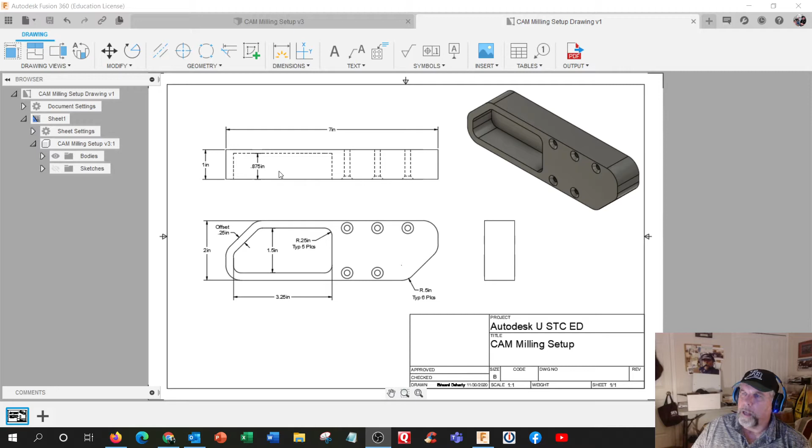Okay, we're going to talk about making a blueprint or a drawing. I just started one here, but I'm actually going to use a sample out of your Fusion 360 class, the introduction class.

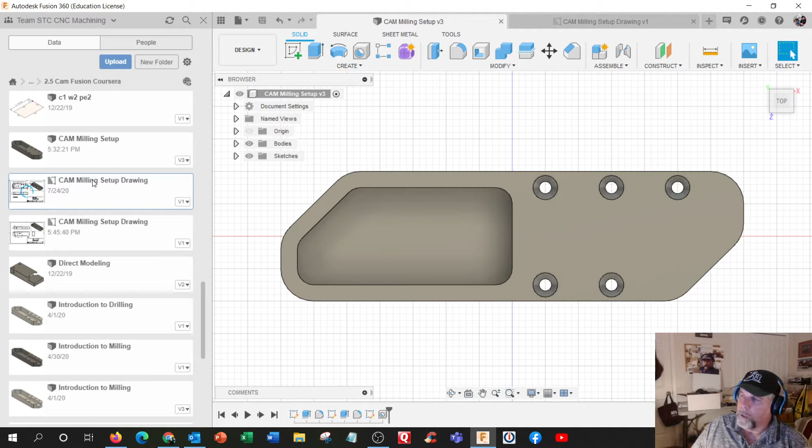In the last week, they got introduction to milling and CAM milling setup right here. Look at that, it's got a CAM milling setup drawing. Here's one here. Let's look at this drawing. I think I kind of like that. That's a pretty good example right there.

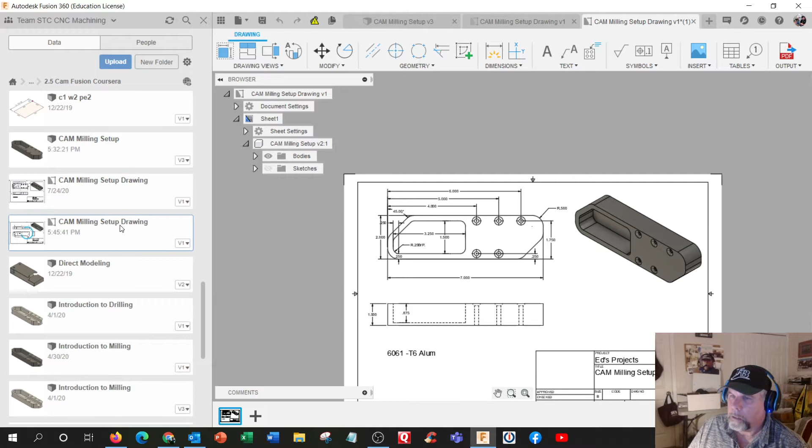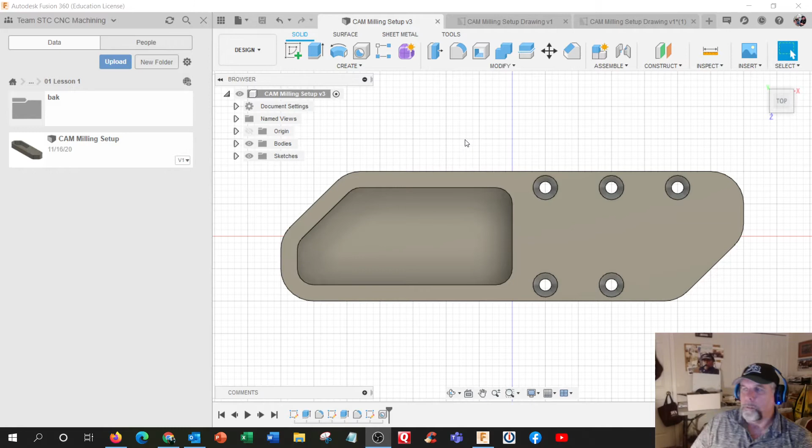And there's another. This is the one I just was working on, this one here. So if you're in your Fusion class, week 3, it says CAM milling setup right here. And this is what we're going to use to make a drawing from. It's a good example, a fairly simple part.

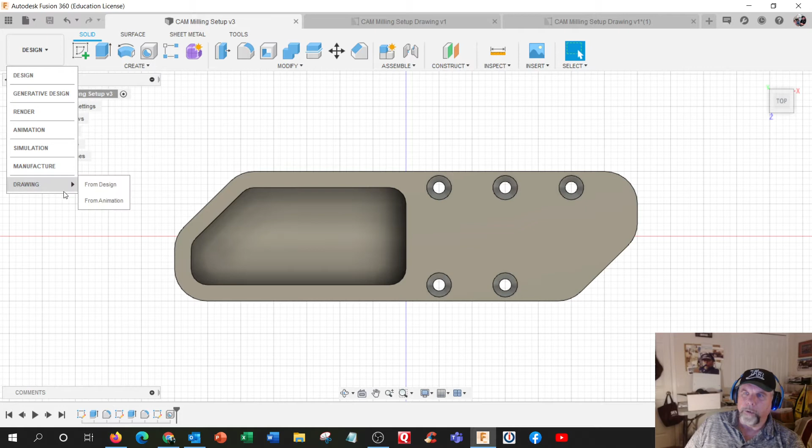So you've imported one, you didn't have to design it. And so we're going to go. So we're using design, manufacture, and now we're in drawing from design. Up here you have as choices: full assembly, visible, or select. And there's only one, so I think any one of these would work. I'm going to create new,

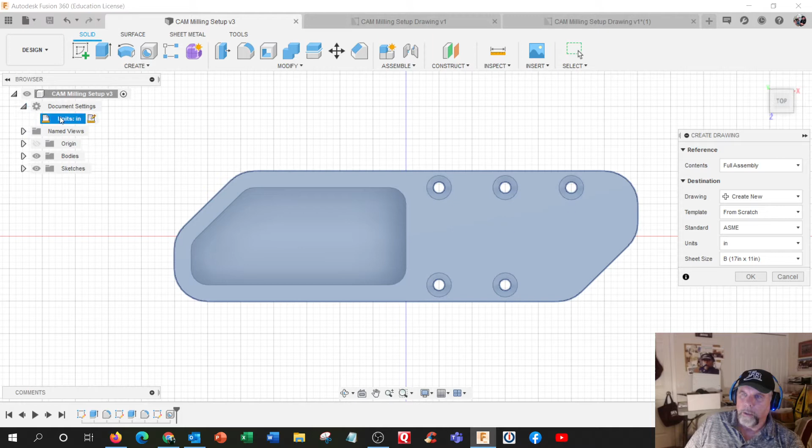and from scratch, and then we can pick a sheet size. We'll just go with the standards. And is this actually designed in inch? Because we didn't design this. And it is an inch, so we're going to keep it an inch. Hit OK.

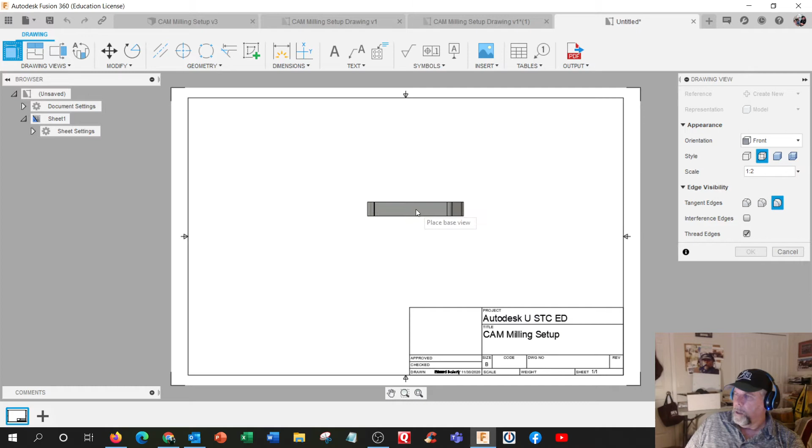Okay, you're going to get actually a quickie setup here. The bottom right is called a title block. But right off the bat, it's trying to place one view, and that's this one here, base view. Personally, I don't like this front view. I want it to be the top view, this one here. I can hit enter, and there's my view right now.

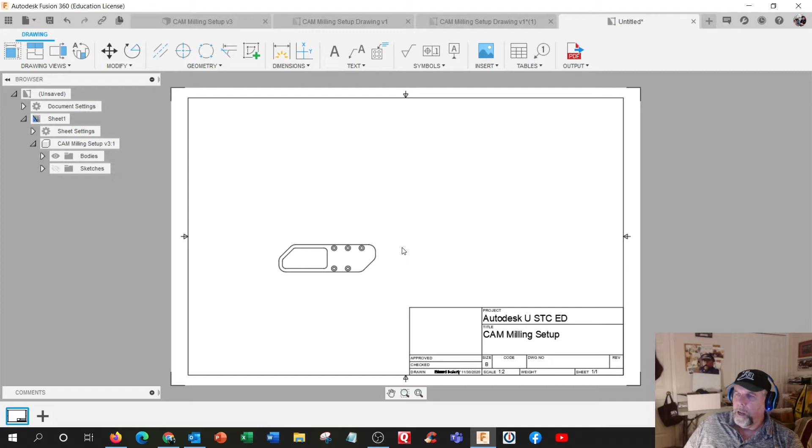Now, I want to have other views based on this, what we call a 2 or a 3 view drawing, and maybe an isometric view on the side. I also want to say that probably this paper is too big, or the scale of this is too small. So I'm going to actually change the scale. I'm going to go in, right click and hit edit view.

And up here it says drawing view. We're working on top, so let's change the scale. And let's go 1:1. And that looks a little bit better. All right, I'm just going to hit close.

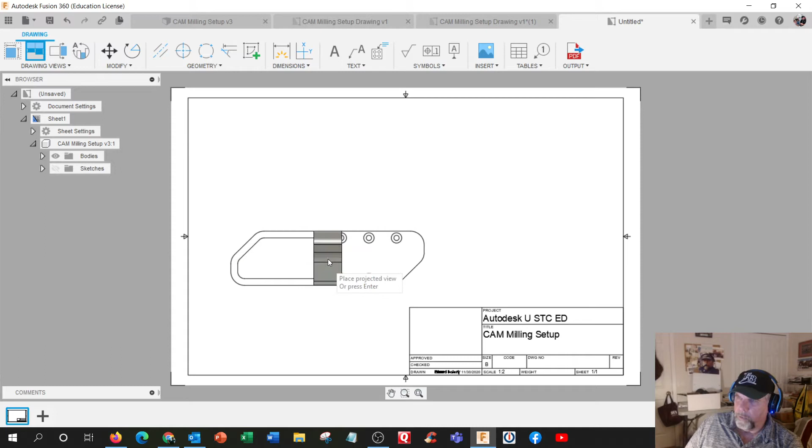All right, so I need to have what call it. I actually call this a front view, and then I have a top view and a right side view. So up here we're going to have projected view based, and it says select parent view. This is the parent view, and I'm going to go up here. And these will stay aligned with each other. You can move them in this direction, but you can't move them left and right. So everything will be lined up. I'm just going to put this here temporarily, hit enter.

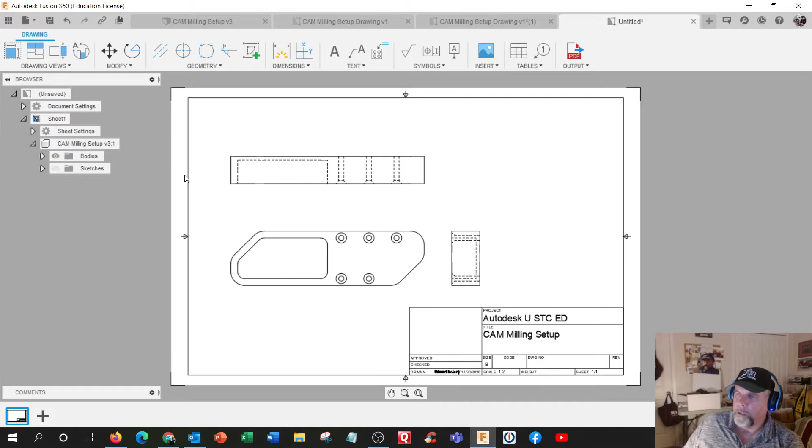And I'm going to do the same thing again on the right side. I'm going to put one right there. Hit enter. That's your typical 3-view drawing in the US standard. I think it's called third angle projection or something like that. I'm going to add an isometric view, so I'm going to click the parent view, and I'm going to put one up here, and right about there. Looks good, right there, hit enter.

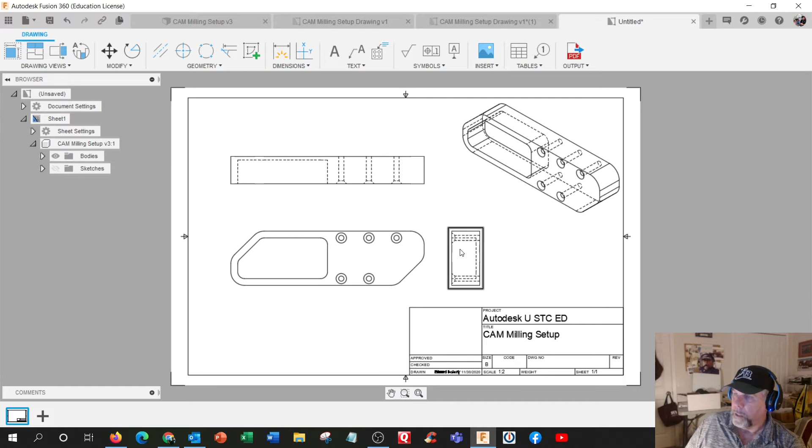All right, so let's do some housekeeping. These are called hidden lines. This says all solid lines, this says hidden lines, like an X-ray view. I want to make this one look like a solid object, like the finished view. So up here, we can select different views. That one's not bad, that one's got hidden lines. That one is shaded, I think I like that one, right?

I think up here the hidden lines are going to benefit us for dimensioning, and this may or may not. We may not even need this view over here, because over here I can see this can give me the depth of the pocket, and I can see these are through holes and they have countersinks only on one side. So I really don't need to see the back of this to know that they're just through. And this is kind of redundant, so I probably don't need this. But I'll leave it there for now.

Alright, so the first thing you've got up here, we got base view, projected view, and this is called sectional view and detail view. We'll get into these later.

And you have modify, which is moving or rotating. And these are like geometry lines for the print: center line, center mark, center mark pattern, edge extension, or you can actually create little sketches on here. So this isn't solid modeling, it's really two-dimensional.

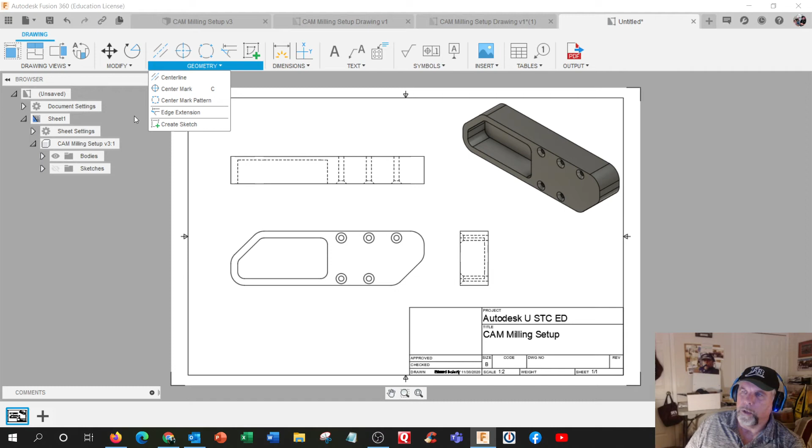And up here, this is dimensioning, the nuts and bolts of this thing. This is your standard dimensioning, this is called ordinate dimensioning, linear dimensioning, aligned, angular, radius, diameter, and baseline dimensioning and chain dimensioning.

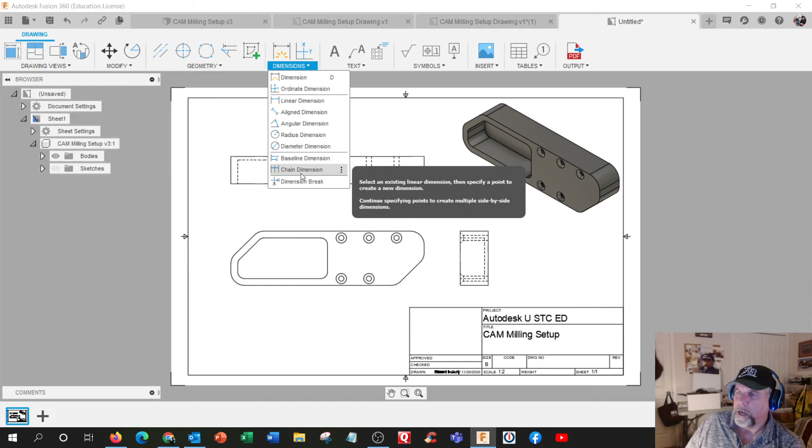Up here you have text, or text with a note, with a lead—they call these leader lines. And this one says hole and thread note. And up here you have surface texture, and these are called GD&T dimensions. This one's for inserting an image like a picture, and then tables for like a parts list.

And then last is PDF—you're not going to send them your Fusion file, you're trying to send it to somebody or have a document that you could have in the shop. So I'll put PDFs of these.

Alright, so we need some basic dimensions, all the big numbers. We'll just click on this one. So select edge or specify point on an object.

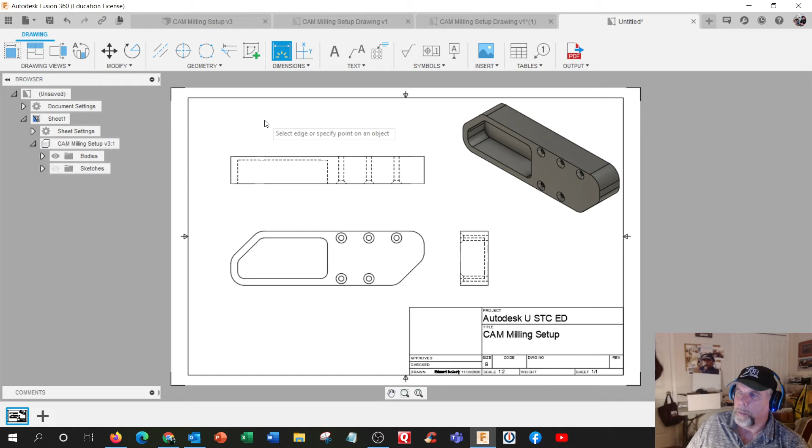So I need to know this entire length. Make sure if there's any radiuses up here, you got to be careful where you click. But this is a square corner, so this should be fine. So go to that corner and over to this corner right there, and pull it up. So that's 7 inches.

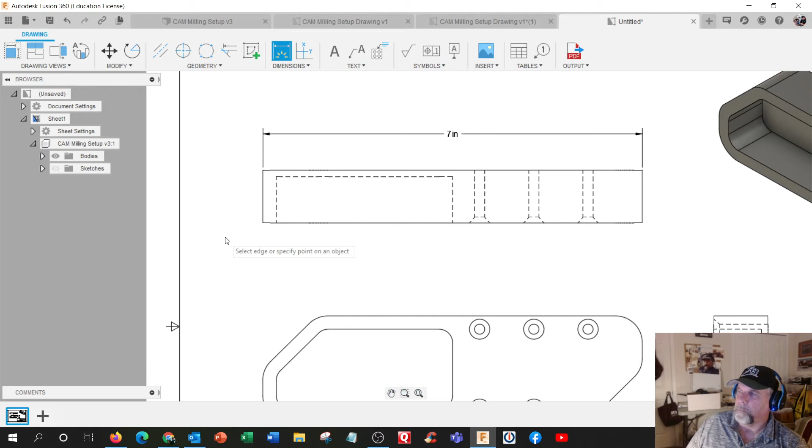Okay, and note that proper dimensioning should never touch the object. This is the object, and these are dimension lines.

All right, let's do the total thickness of this thing. Maybe I'll do it from here to there, and bring this out to there.

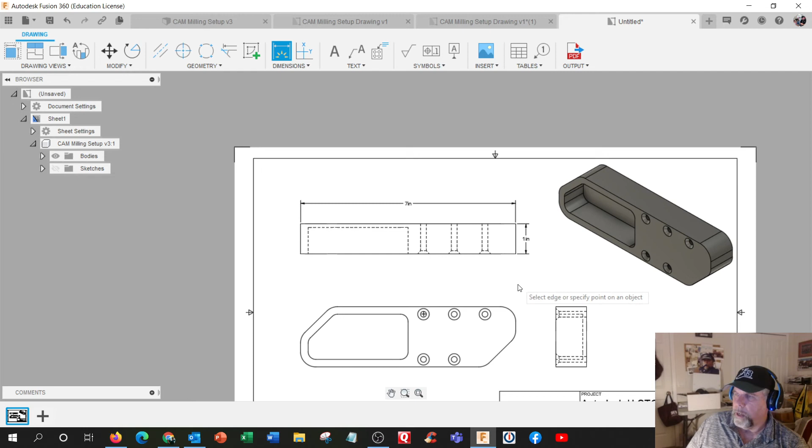And I need to know the width, so I can only do that on one of these two views. So maybe this will come in handy for that. I'll put this one here. And I think I'll remove these hidden lines. There we go, hit close.

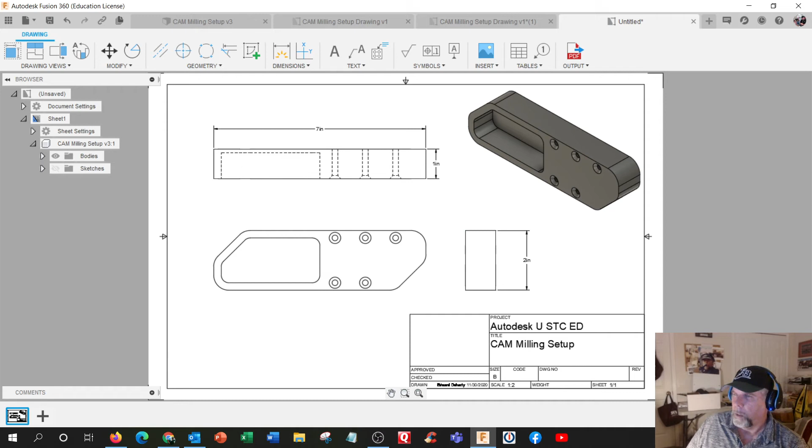Alright, now I'm looking at these and I said, I think these numbers are kind of hard to read. I got sheet settings right here. You have sheet size, title block, and document settings. You got font, Arial, text height.

Let's change the text to .240 tall. Hit OK. Well, that's easier to read.

And let's get this to read a little bit better. We have dimensions, inch, decimal format. I don't see any decimals there. Double click. All right, decimal format, yeah, linear dimensioning, angular.

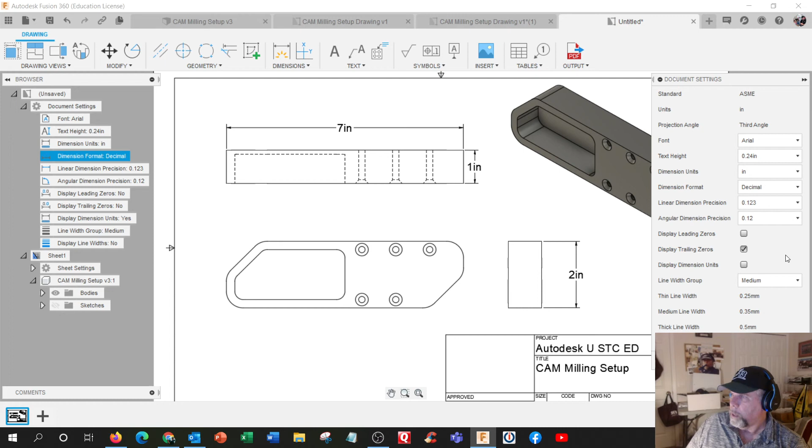I want to display trailing zeros. And do I really need it to say inch? I don't know, I don't think so. Well, let's try that. Alright, that's a little bit better.

Move this out a little bit. Also, these trailing numbers are also an indication of tolerance.

All right, let's get some other ones in here, like the depth of this pocket. So we'll go from here to there. So what, many choices? Oh, I could put it right there. I think. All right, okay, that's pretty good.

And probably the size of this thing and the position and the radiuses. Let's do the outside radiuses. So we want to have radius, not diameter. Have radius, and if I put one here, and that's that one.

Let me just, oh, let me go back up here again, dimension radius. That one, that one, that one, that one, and that one. Okay.

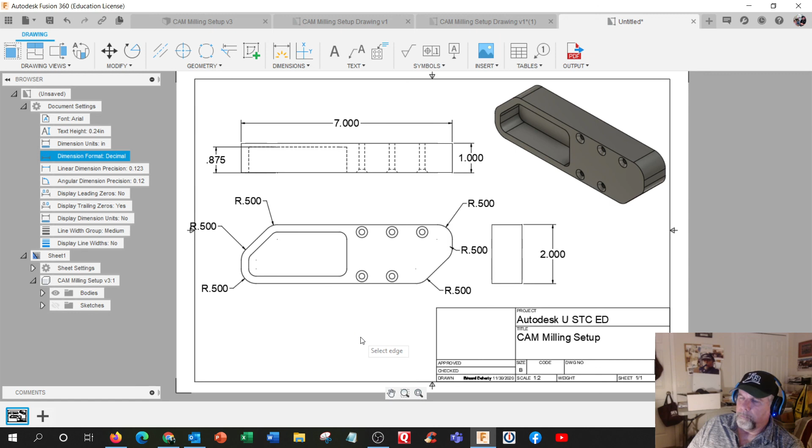We're going to be putting more dimensions on here, and this is going to be very cluttered. We only need to say 0.5 in one area and say typical 6 places—that'd be descriptive enough. So I'm...